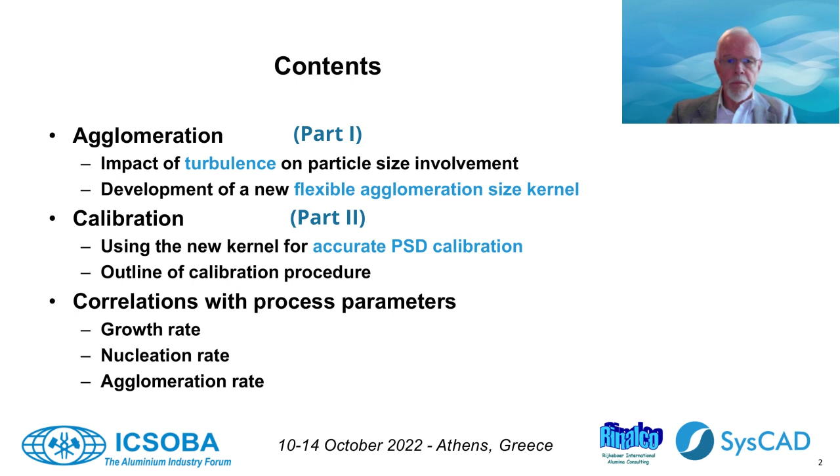I start with two observations. The first one concerns agglomeration. Agglomeration is strongly dependent on the hydrodynamic conditions within a precipitator. These hydrodynamic conditions differ between the types of tanks and between the various locations within a tank. Therefore, the particle interactions cannot simply be captured by one rigid laboratory-developed agglomeration kernel. We need a pragmatic approach that better suits the reality of a plant environment. We need a flexible kernel in combination with an appropriate calibration procedure.

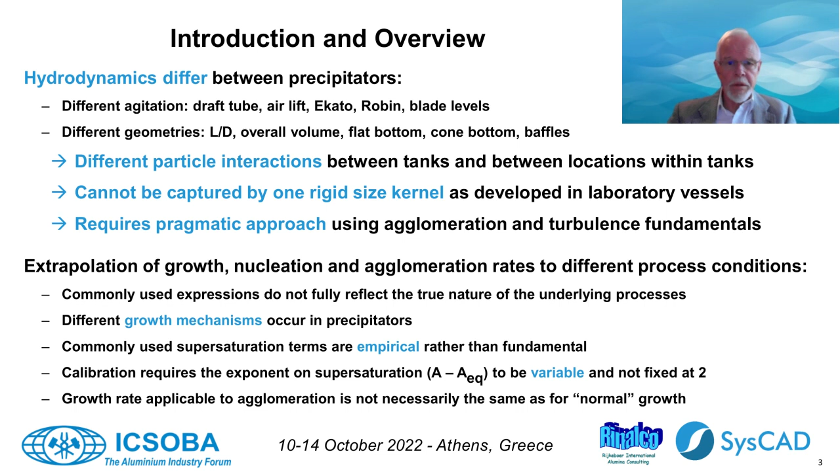The second observation concerns the rate equations for growth, nucleation, and agglomeration. There appear to be some misconceptions, especially regarding the definition and application of supersaturation. But first, agglomeration and its relationship with hydrodynamics. The science of turbulence in a tank.

Andrey Kolmogorov was a scientist who made major contributions to the understanding and description of turbulence as follows. An agitator introduces kinetic energy into the fluid of a tank in the form of large eddies or a vortex. These break down into smaller eddies and even smaller eddies and so on, until all the kinetic energy has been converted into thermal energy as a result of viscous-induced shear. The breakdown proceeds through three categories of eddy sizes: large, full turbulent eddies, medium-sized eddies in a transition zone, and small laminar eddies.

This looks similar to the classification of fluid flow through a pipe as a function of the Reynolds number. Except the Reynolds number is dimensionless, while this scale here is a microscale with a dimension of length, in our case expressed in microns. You go from fully turbulent to fully laminar, from primarily inertia effects to primarily viscosity effects, from no energy dissipation to complete energy dissipation.

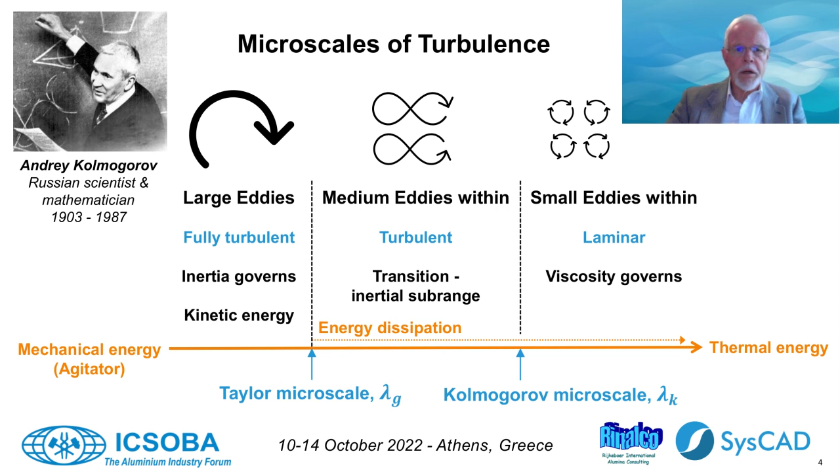The microscale where viscosity starts to play a role and energy dissipation starts is the so-called Taylor microscale. The transition point from turbulent to laminar is the so-called Kolmogorov microscale. How does this translate into particle interactions and agglomeration? In the process of agglomeration, there are two steps: collision and consolidation. First, collision.

Particles smaller than the Kolmogorov microscale travel parallel to each other inside the small laminar eddies. In laminar flow, you will normally have a viscosity-related, shear-induced velocity gradient. Collisions between these small particles occur because particles catch up with each other as a result of this velocity gradient. The chance of collision as a function of particle size has been worked out mathematically by Smoluchowski and others. I'll show you in a moment.

Particles larger than the Kolmogorov microscale are subject to trajectory changes and velocity changes relative to the fluid because of inertia effects. This is the main cause of collisions, and these collisions are with all particle sizes, thus also with small particles crossing their way. The second step is consolidation. This is the balance between cementation and rupture, thus between growth rate and shear rate, which is proportional to agitator power input.

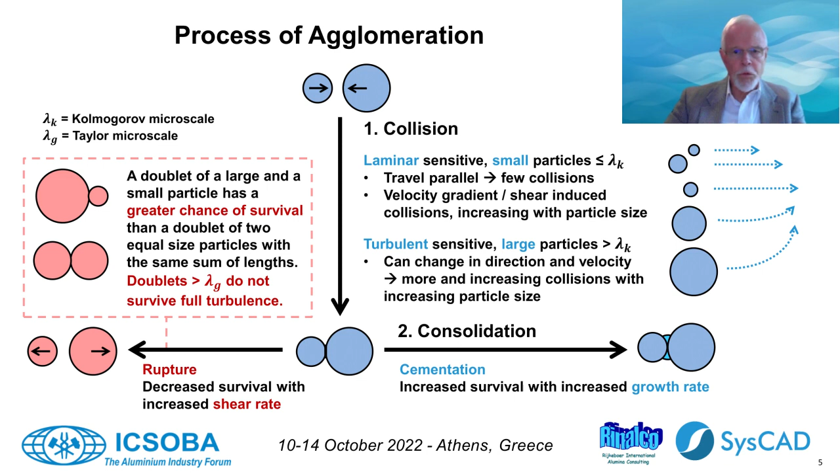An agglomeration kernel has two elements: agglomeration rate, which depends on, for instance, growth rate, shear rate, temperature, and a size kernel describing the chance that a particle of size x forms an agglomerate with a particle of size y.

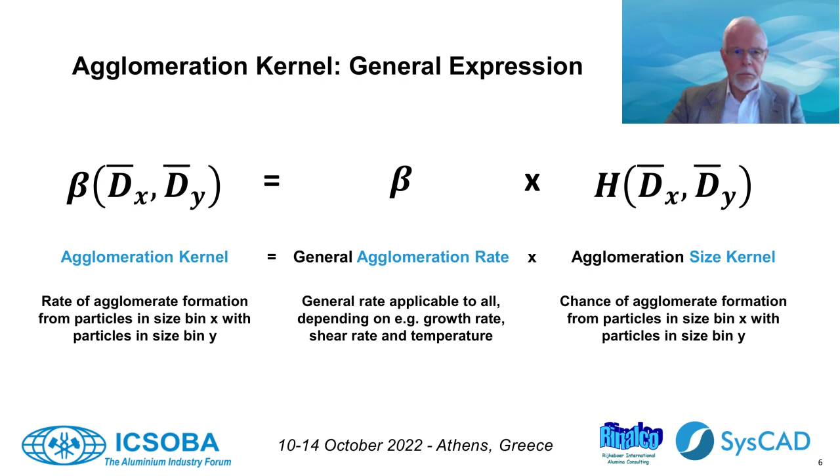Expressions exist for the Kolmogorov and Taylor microscales. You will find those in the paper. But because of the variety of hydrodynamic conditions within a precipitator, we won't use those expressions. Instead, we simply find the values for those microscales through calibration of a new and flexible size kernel, which has a laminar component and a turbulent component.

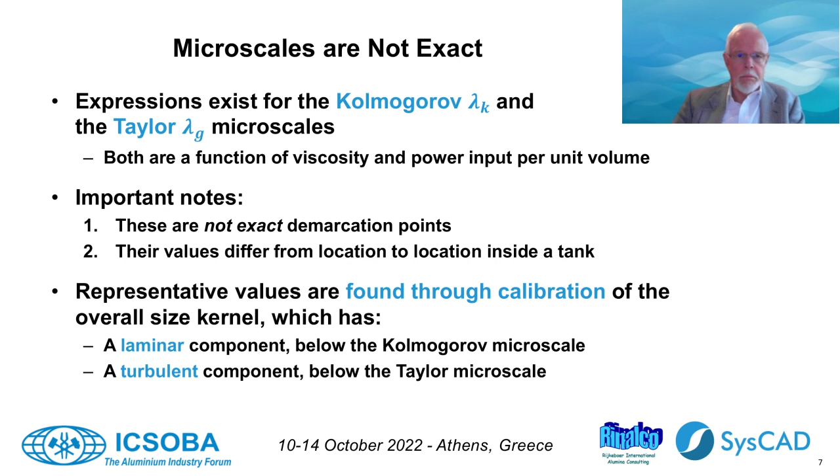The laminar component is taken from publications by René David, who studied some non-alumina hydrate-related agglomeration. The laminar kernel is based on Smoluchowski, with collisions being primarily the result of a viscosity shear-induced velocity gradient.

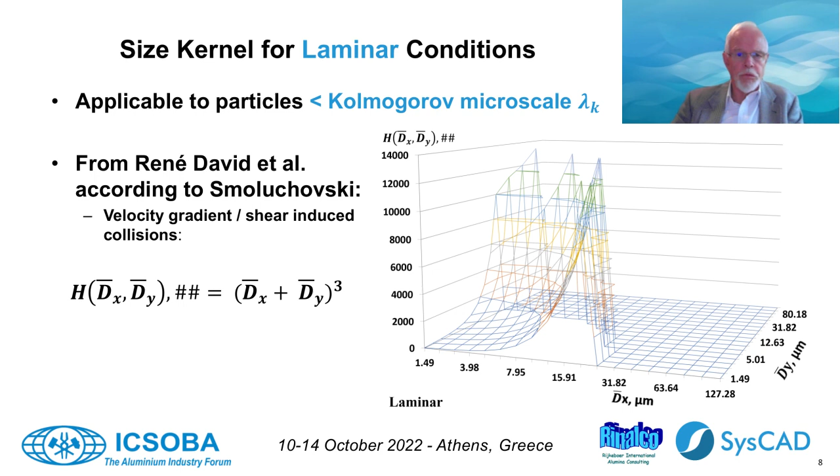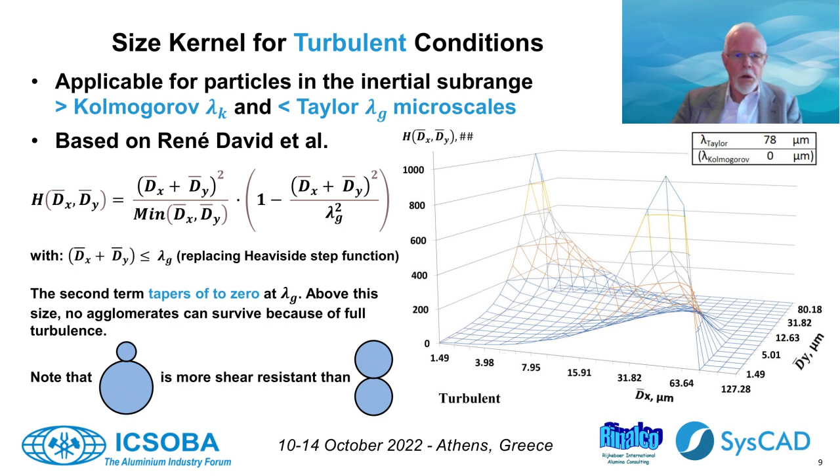The turbulent component is again taken from René David's publications. It consists of two terms. The first term describes the general particle interactions under turbulence. And you can see from the expression and the resulting graph that doublets of a large particle with a small particle have a greater chance of survival. The second term causes agglomeration to taper off when the agglomerate size approaches the Taylor microscale, above which agglomerates do not survive.

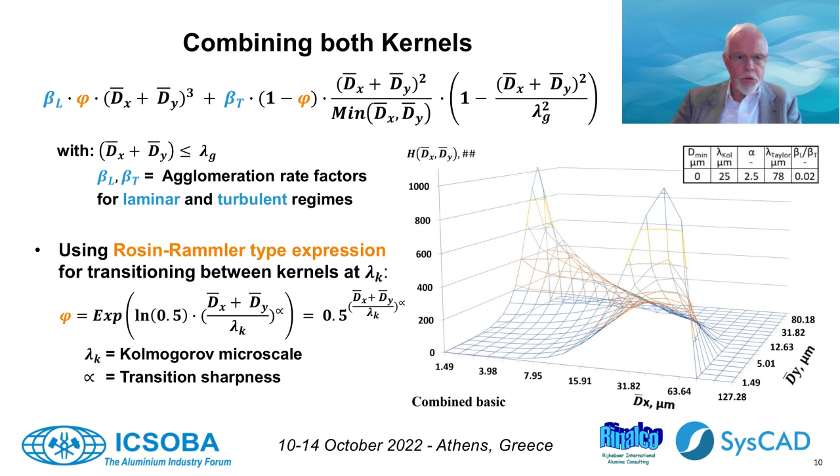Tested with plant data, the new kernel worked better than existing ones, so it is an improvement. But I was still not 100% happy with some of the results. Some refinement was needed. Dan Menche introduced some time ago in SysCAD the possibility of using a generalized mean of dx and dy multiplied by 2 as an alternative for just using dx plus dy for all kernels in SysCAD in general.

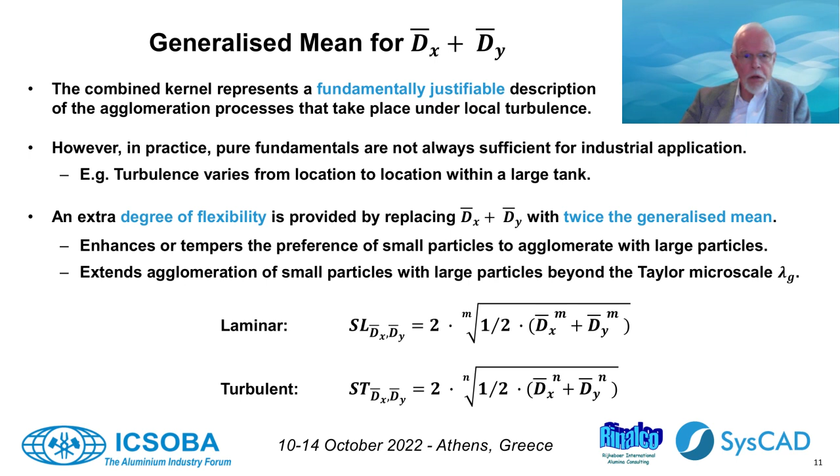Generalized means are a family of means whereby the outcome depends on the value of a parameter. Value 1 produces the straightforward arithmetic mean. Here I use parameter m for the laminar component and transition term, and parameter n for the turbulent component. This proved to be very useful because now you could enhance or temper the preference of small particles to agglomerate with large particles and extend agglomeration of small particles with large particles beyond the Taylor microscale.

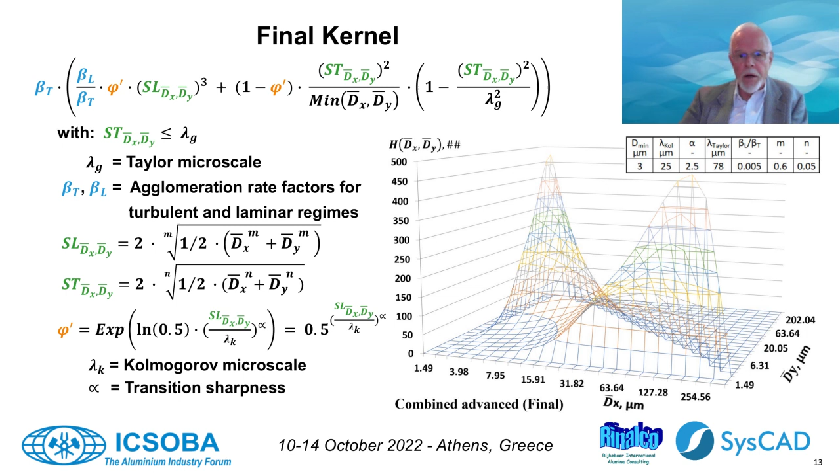The final kernel has a large number of variables, which allows you to shape the kernel into the correct profile of particle interactions. At the same time, the kernel is still based on fundamental principles regarding the impact of hydrodynamics on agglomeration.

This ends part 1 of the presentation. In part 2, we continue with calibration of the new kernel and with a discussion on rate equality.